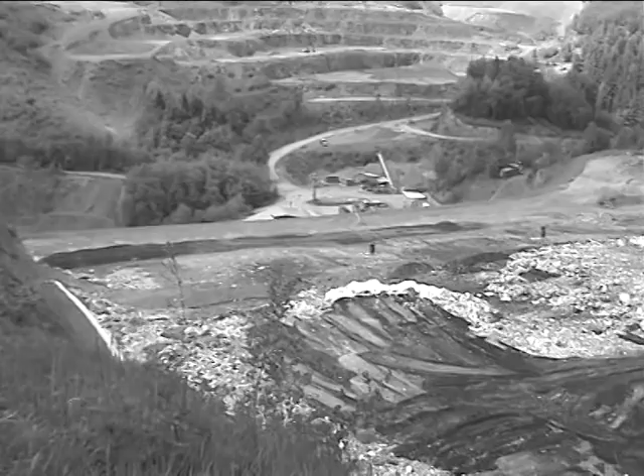Every day we produce tons of waste. Unfortunately, the vast majority of what we throw away ends up in landfill sites. In the Czech Republic, there are around 400 landfill sites in operation, and still more have been sealed up. We have buried a huge amount of problematic and dangerous materials underground. This inheritance for future generations has rightly been called an ecological time bomb.

Among the municipal solid waste stored in landfills, a variety of rotting and fermenting processes are also taking place. Viruses, bacteria and other pollutants are multiplying. In order to keep these hazardous substances from getting into the soil and thereby threatening the ecosystem, landfills are lined with impervious films. However, in time these crack and harmful substances leak out into the soil. It is also very difficult to find space for landfills, the establishment of which devalues agricultural land. If we continue down this path, then within a few years we could literally be wading in rubbish.

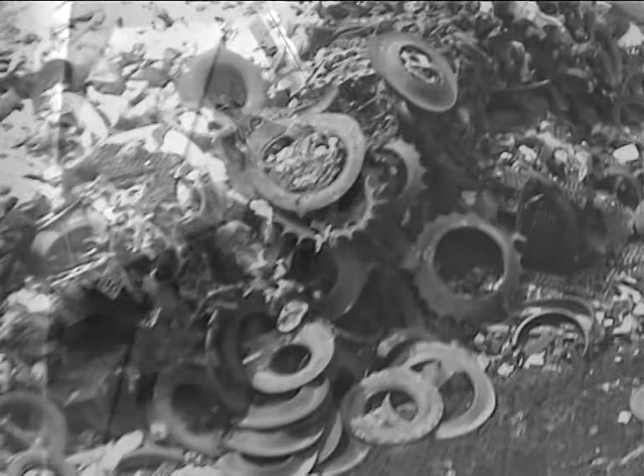The trend in the European Union is to limit landfills and instead incinerate waste for its own benefit. In the EU, individual states resolve environmental issues together, as this field does not respect political borders. Obviously, incineration does not preclude recycling, because even after sorting recyclable materials, a large quantity of combustible waste remains. A modern incinerator gets rid of waste on the one hand and uses its energetic potential for producing heat and electricity on the other. How does it do this?

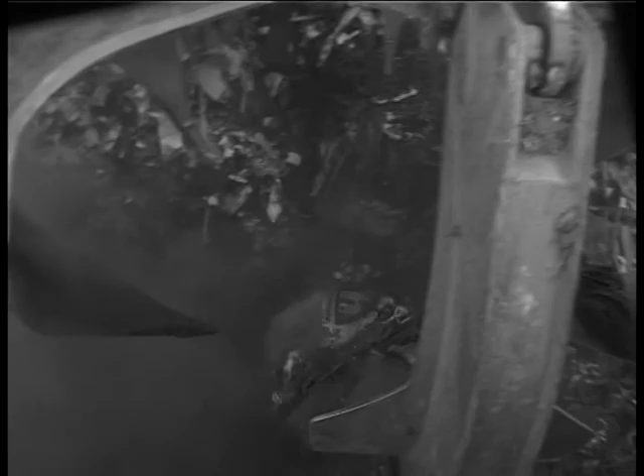You will find out in the next few minutes as we introduce the operation of the Liberec municipal waste incinerator of the Termizo stock company.

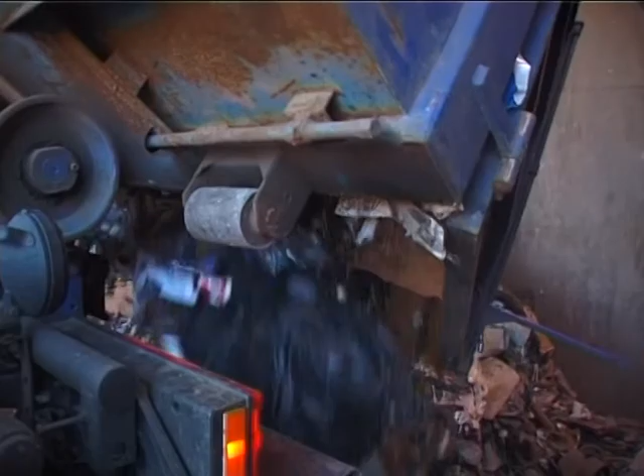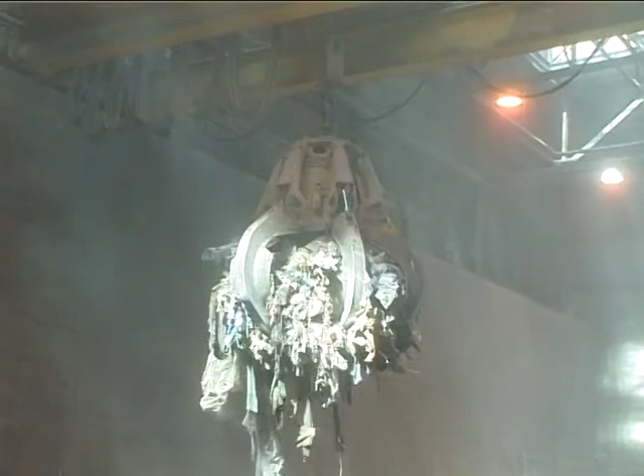The incinerator is a facility for energy recovery. More specifically, it uses solid municipal waste that would otherwise end up in landfills for heat production. The Termizo facility has an annual capacity of 117,000 tons, which is half of the waste produced in the Liberec region. This capacity is filled without a problem. The annual supply of heat to the central distribution network is 600,000 gigajoules, and the facility also supplies 13,000 megawatt hours of electrical energy to the electricity grid per year.

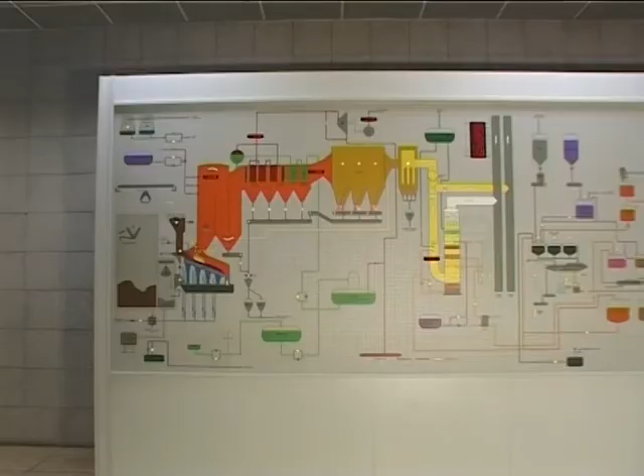The Termizo Liberec incinerator was put into operation in 1999 and since then has worked without problem. Four highly qualified workers take care of the running of the facility in continuous shifts. Operation of most technological units is fully automated. The staff carry out surveillance and control of individual parts of the equipment of the incinerator.

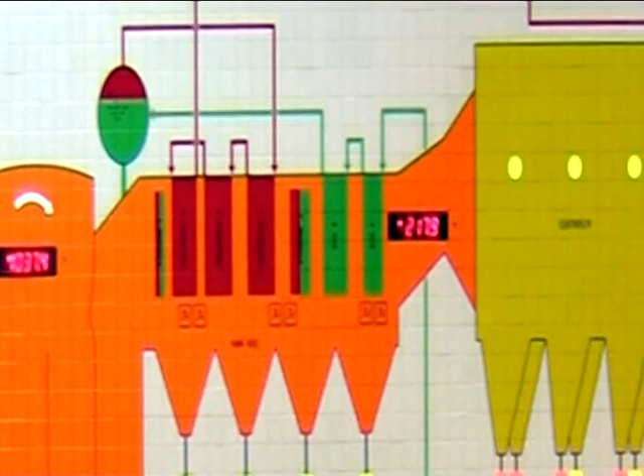The system by which the incinerator literally converts waste into electricity and heat can be seen in this diagram. The waste is first stored in the bunker, from where it goes to the furnace, where controlled incineration takes place. The steam generated is piped to the heating plant, and then through the centralized heat supply to individual users in Liberec. In the meantime, the steam is used for the turbine that powers the generator where electricity is produced. This is used for the facility's own needs and further to the energy distribution network. That is how the Termizo incinerator in Liberec works.

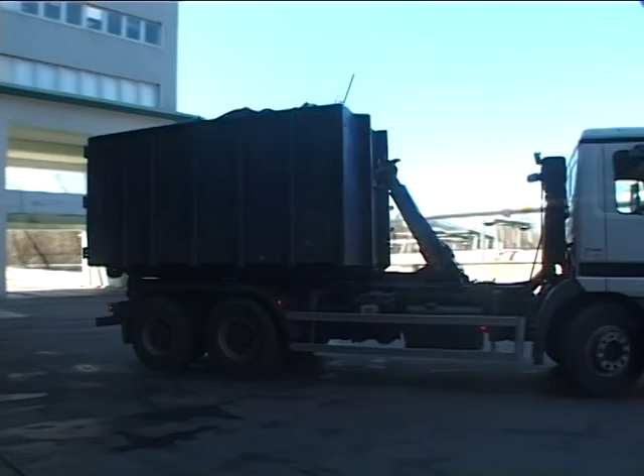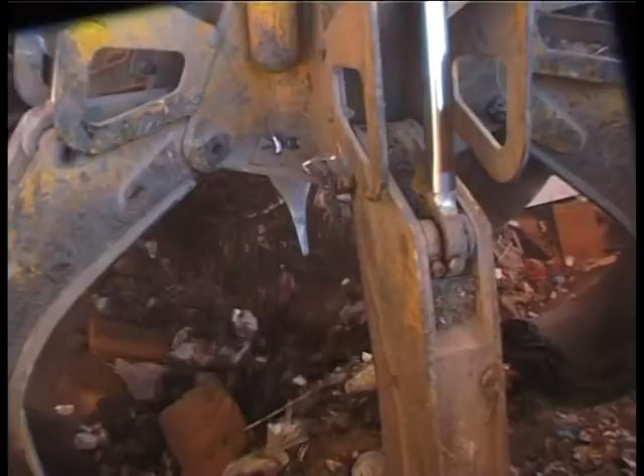Let us have a closer look at its technology. Solid municipal waste is taken to the bunker. This is accessed by 5 hydraulically controlled gates. In the bunker, the waste is mixed with the aid of a crane, thereby constantly preparing it for complete combustion. If necessary, large waste is crushed by hydraulic shears.

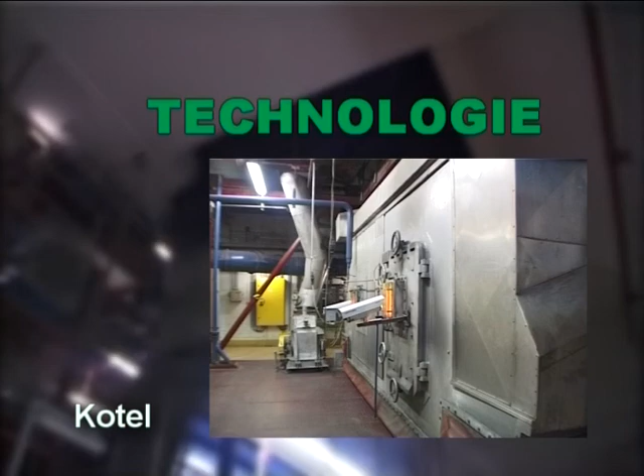Following the preparation, the crane operator loads the waste into the furnace funnel. The facility can process 117,000 tons of waste per year, meaning that an average of 15 tons per hour go through the funnel. From the funnel, the waste proceeds to the hydraulic feeder, which passes it on to the grid.

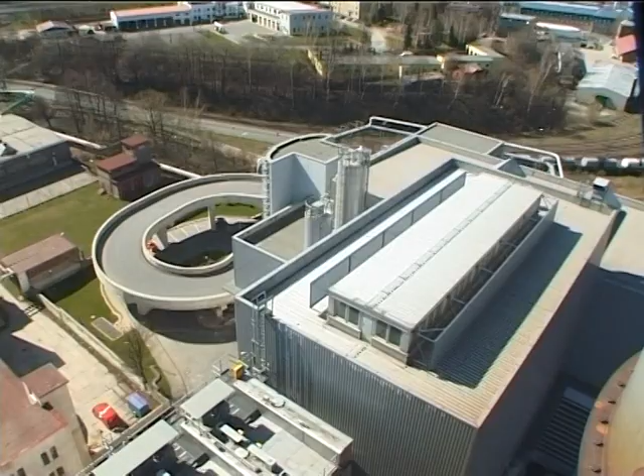The waste is burnt on this moving grid. Combustion air is brought to combustion and blown under the grid from the waste bunker by a ventilator and heated with a steam heater. This causes a slight negative pressure in the bunker, reducing odour and dust emissions to the immediate surroundings.

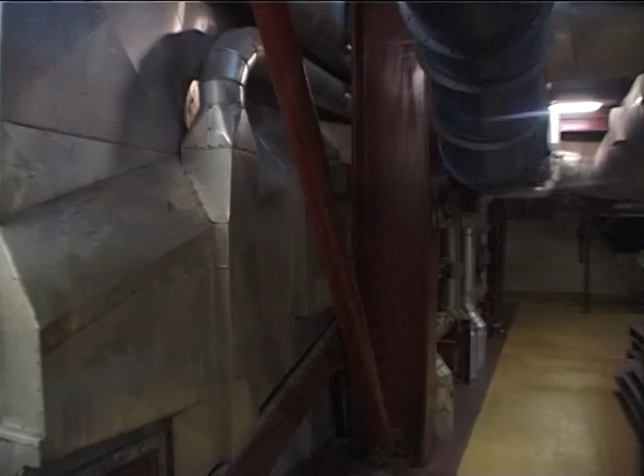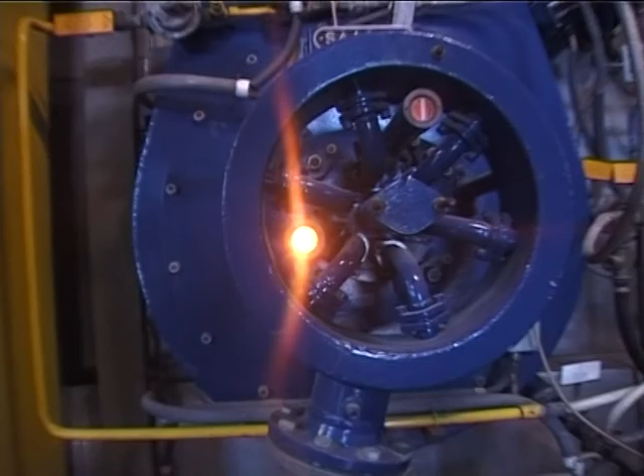Secondary air and recirculated combustion products are brought from combustion to the boiler and blown into the combustion chamber by ventilator. This reduces the amount of combustion products discharged to the atmosphere through the chimney and completes the management of the combustion process. Natural gas is used for waste combustion, and the combustion process is fully automated.

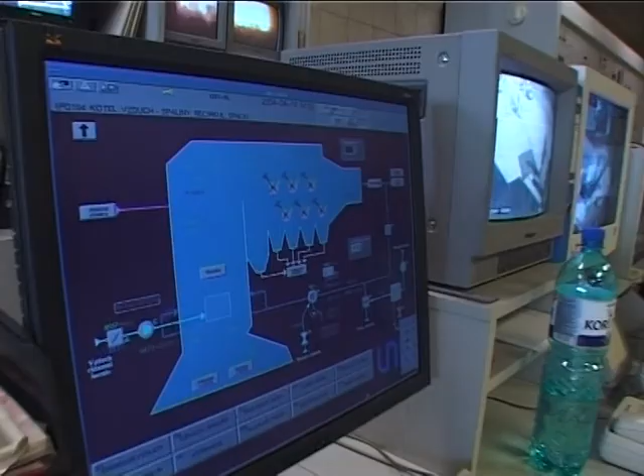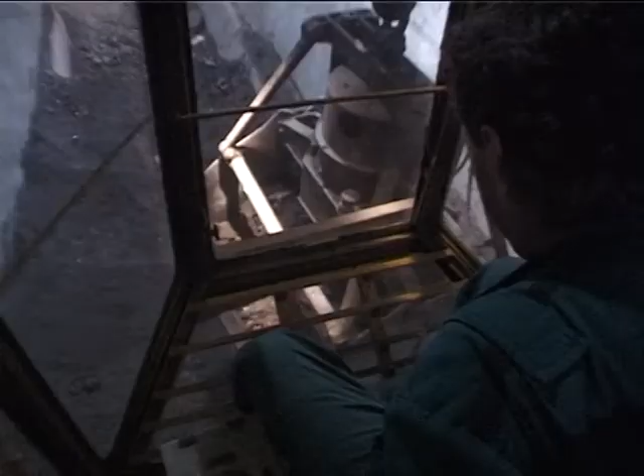The control system monitors individual combustion parameters and continually evaluates any deviations from the required state. This ensures complete combustion and the high quality of non-combustible cinder and fly ash residues. Burnt cinders contain a maximum of 1.5% carbon, which is proof of very good combustion.

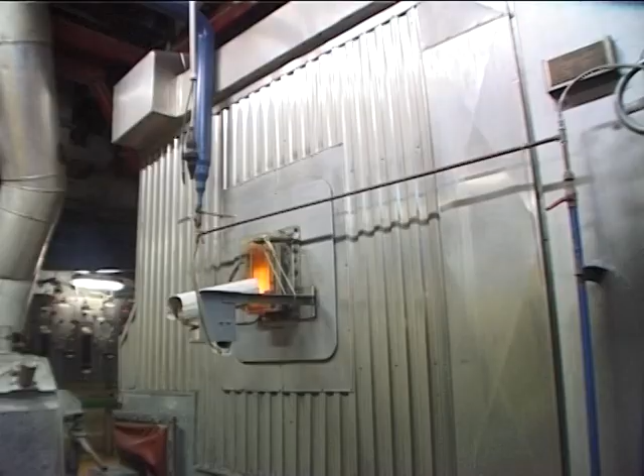The combustion temperature on the grate varies according to performance from 900 to 1100 degrees C. In the burning out zone beyond the combustion chamber, where combustion products remain for 2 seconds, the temperature is between 850 and 1100 degrees C.

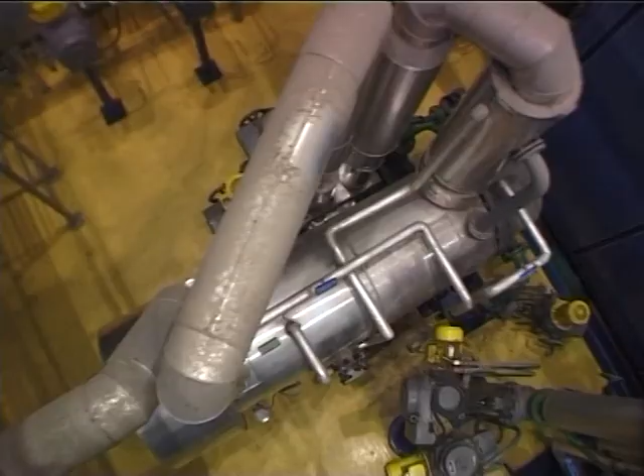Energy released during waste combustion is collected in the form of heat and transmitted to the production of steam. The rated performance of steam in the furnace is 43 tons per hour. The steam has a temperature of 400 degrees C and a pressure of 40 bar.

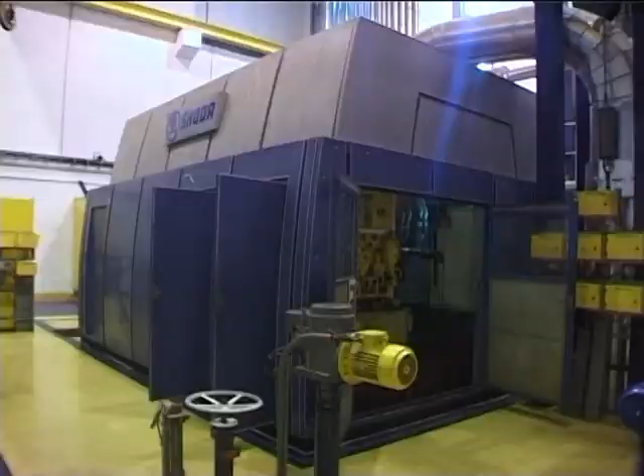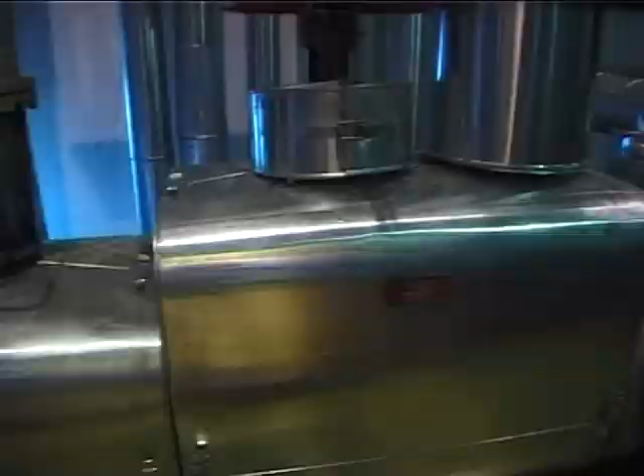This steam is first piped to the back pressure turbine, which has a rated performance of 3.05 megawatts. Thanks to reduction in the turbine, the parameters are reduced to 230 degrees C and 8 bar. Up to 6,000 megawatt hours of electrical energy enters the electricity grid in this way per year.

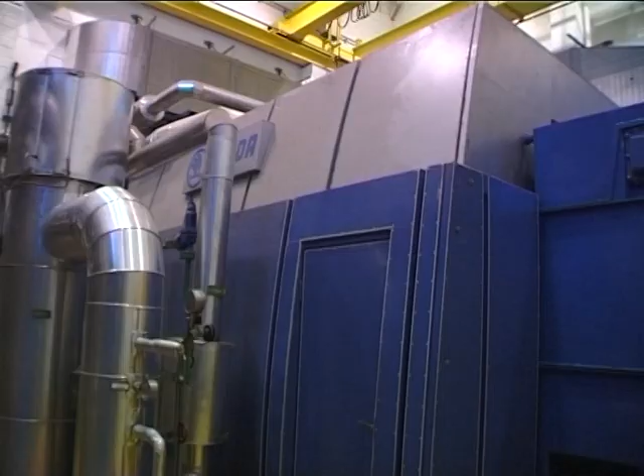Steam from the turbines is piped to the district heating system in Liberec. The effective heat supply is approximately 600,000 gigajoules per year. The described process combining the production of thermal and electrical energy is called cogeneration.

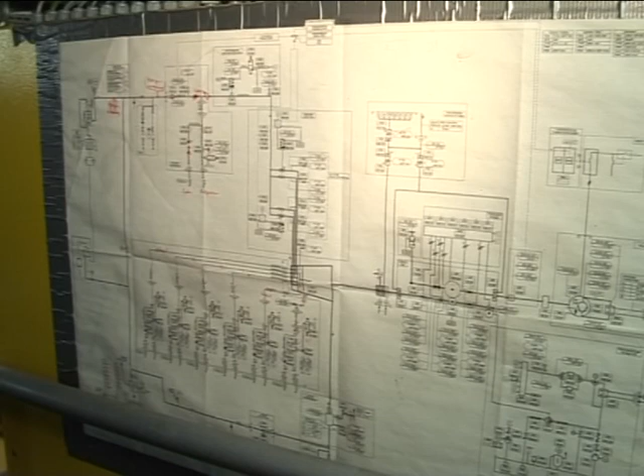The efficiency of use of the steam produced is around 80%, which shows the high level of efficiency of the process. If the customer does not use up all the heat produced, the heat is subsequently used in the condensing turbine with a rated performance of 1 megawatt.

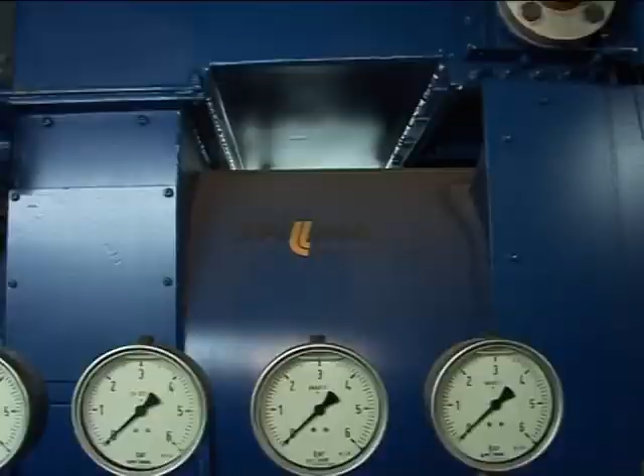Part of this electrical energy is used for our own needs, that is, for the running of the facility. The rest is supplied to the energy grid.

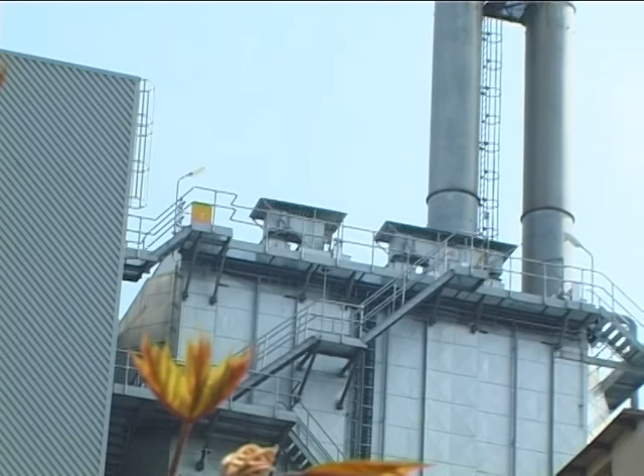As well as high energy efficiency, a strong emphasis is placed on ecology in the Liberec incinerator. Resulting combustion products are cleaned, as is the water used, and fly ash with cinders. For these reasons, electricity produced in incinerators is generally among the cleanest forms of energy.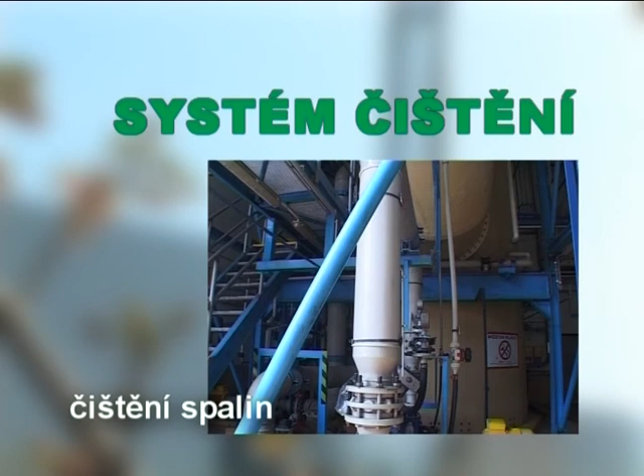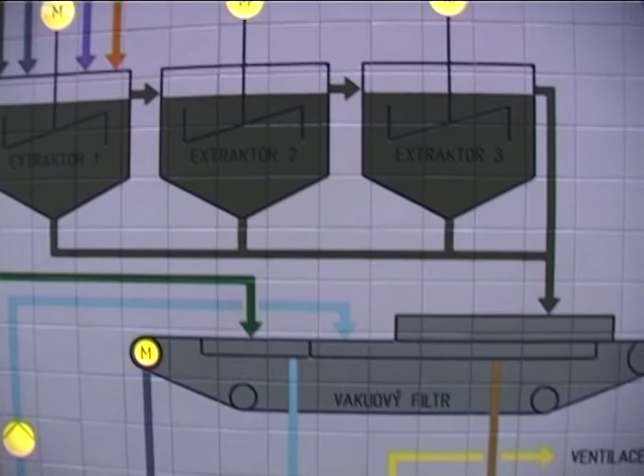First, we will acquaint you with the process of flue gas cleaning. There are very strict emission limits on combustion waste. In order to achieve these limits, 4 degrees of flue gas cleaning have been installed in the incinerator. These are the reduction of nitrogen oxide, fly ash capture, the capture of dioxins, and wet flue gas cleaning.

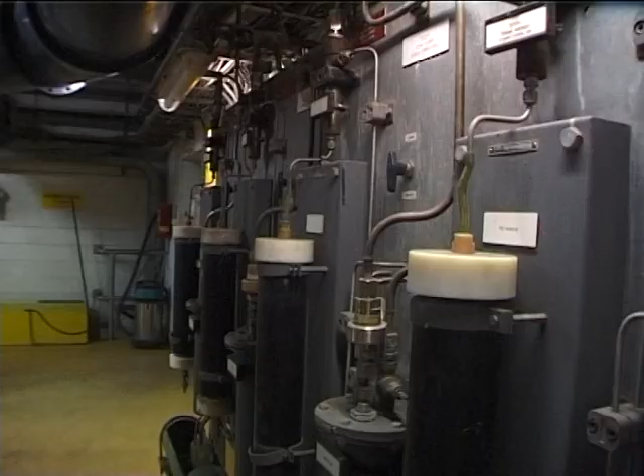Nitrogen oxide reduction in the incinerator takes place directly in the combustion chamber, which is administered with a 25% ammonia water solution. Subsequently, the so-called selective, non-catalytic reduction of nitrogen oxides is carried out.

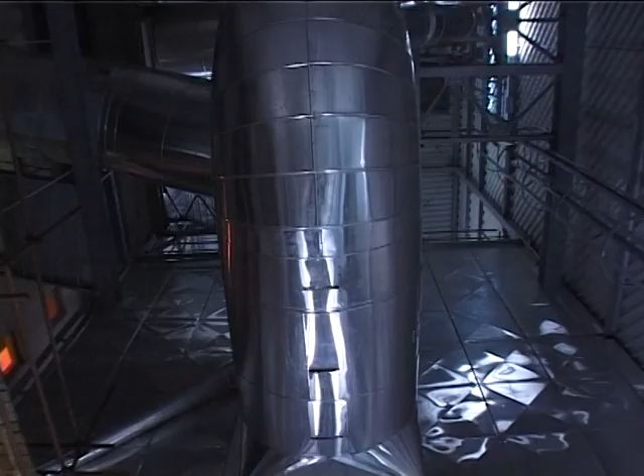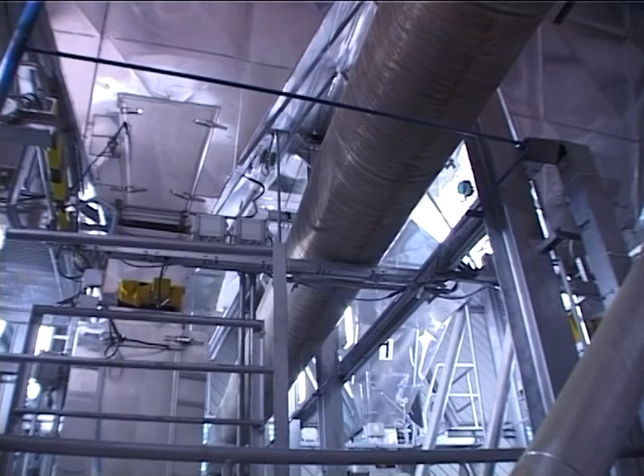Dioxins are disposed of with a special filter. On this dioxin filter, they are split into elemental components with the aid of catalytic oxidization, that is water, carbon dioxide and hydrogen chloride. Oxidation takes place in a layer of woven filter with a filter area of 1,800 square meters.

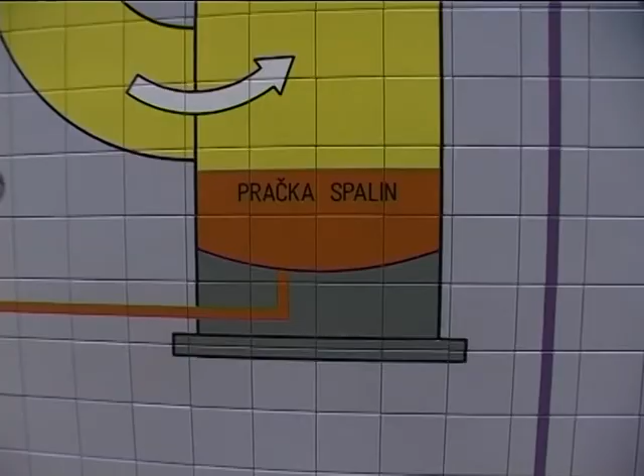The remaining gas oxides are cleaned from the incinerator by the so-called wet process. For this, the flue gas washer is used, which has 3 stages.

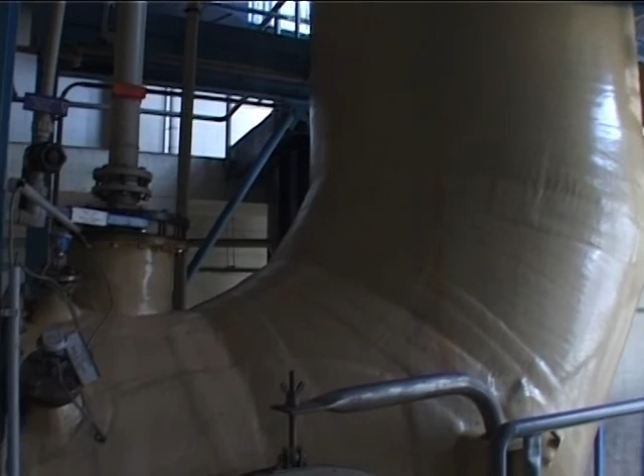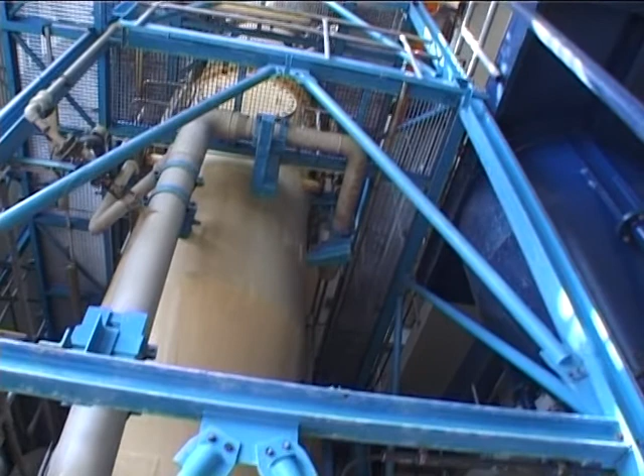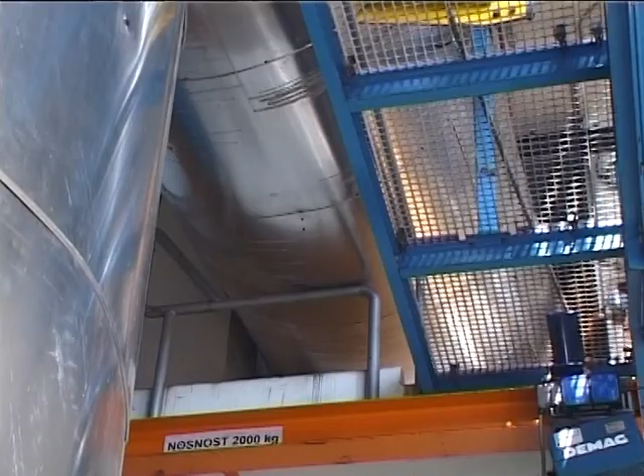In the second stage of flue gas washing, the absorption of sulfur dioxide and sulfur trioxide takes place. The flue gases are brought into contact with softened water, into which caustic soda is administered by regulation. The flue gases rise from the bottom to the top, thereby filling up the washer against the current of technical water.

This leads to a change of substances, and the sulfuric oxides removed from the combustion products have a pH of 6 in the technical water.

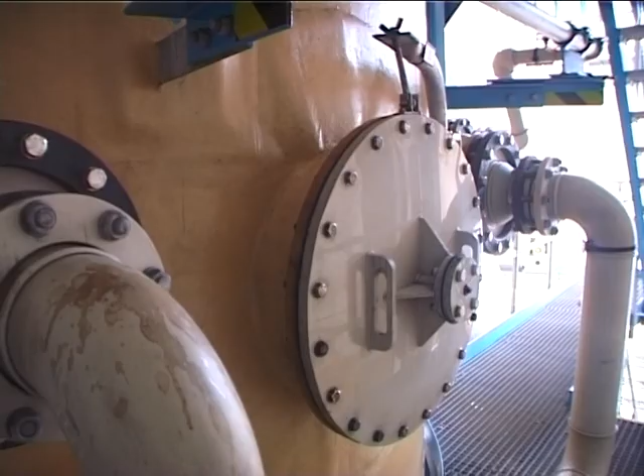The third stage of flue gas washing is the ring jet. This removes dust and aerosols, that is, the smallest particles. Following the third stage of wet cleaning, the flue gases pass into the chimney. Their temperature upon exiting the washer is approximately 65 degrees C.

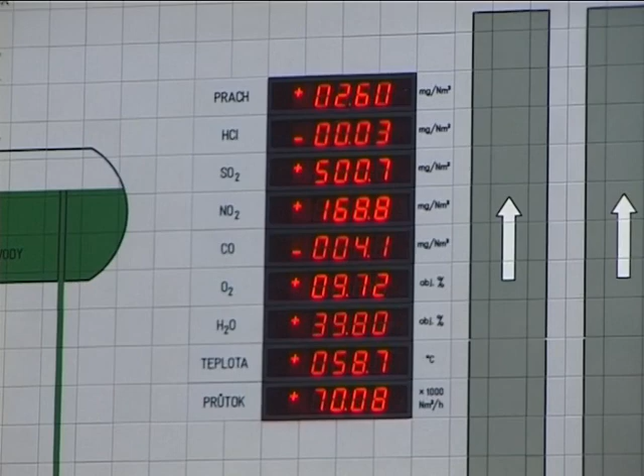The cleaned flue gases are released through the operational chimney into the atmosphere. At the very end of the chimney, the gases are continuously measured.

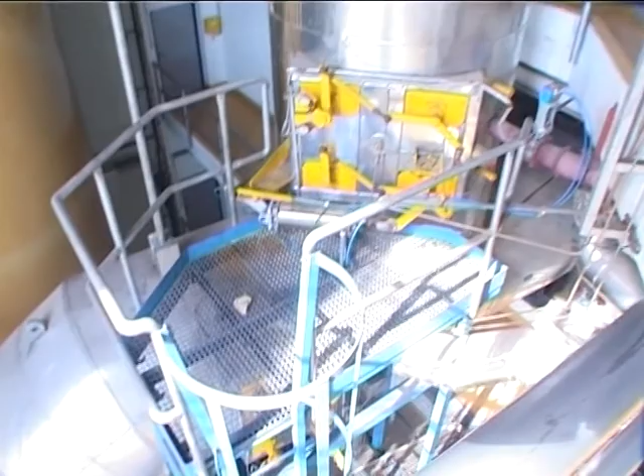Upon failure of the washer or during a power cut, the flue gases are automatically transferred to the so-called emergency chimney, which is normally closed by automatically controlled flaps. At the same time, the incineration process is stopped, and for as long as is necessary, only flue gases from the burning out waste in the incineration chamber are released. That is how flue gases are released safely into the atmosphere during exceptional circumstances.

Besides flue gas, waste incineration also produces cinders and slag. To stop raw cinders exhibiting their hazardous qualities, soluble salts and extractable heavy metals are removed from them. This is done with the aid of acidic water, which comes from the flue gas washer, more specifically from the first stage, that is the quench.

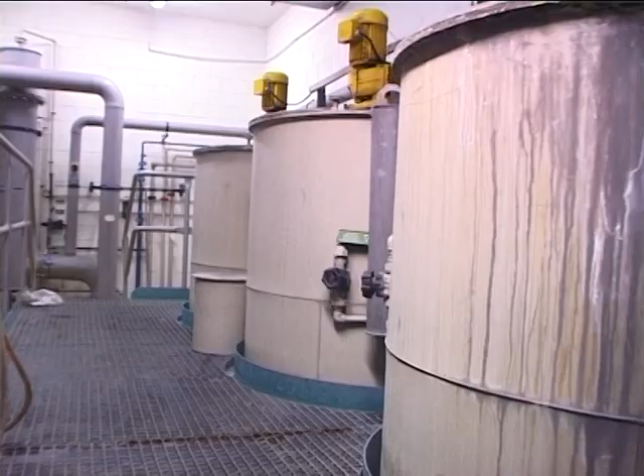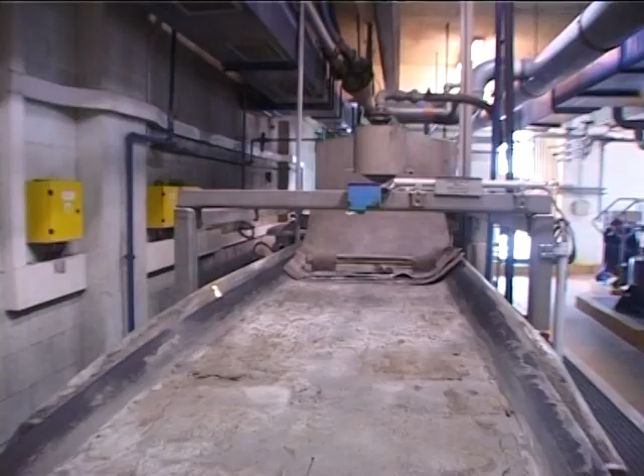Cinders stored in the silo after their removal from the flue gas are administered to a trio of extraction tanks. Here they are infused in water with pH 3.5 and a temperature of 65 degrees centigrade. Next, they are brought for dehydrating on a vacuum filter belt.

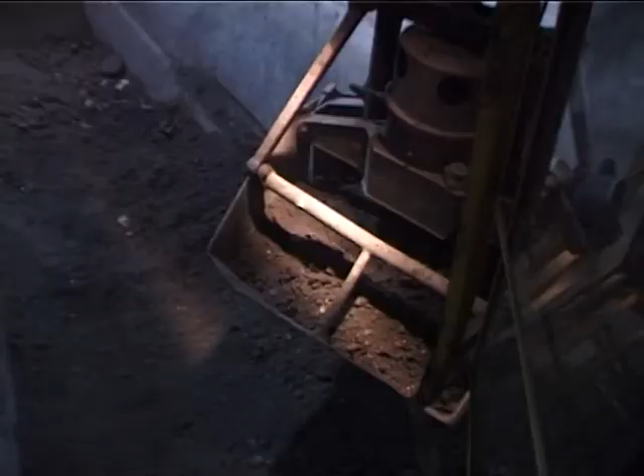Cinders washed in this way are taken to the slag bunker, where they are mixed with slag. This does not exhibit dangerous characteristics. The resulting material is used in construction, e.g. for landscape cultivation. The qualities of this product are guaranteed by production in accordance with quality certificates.

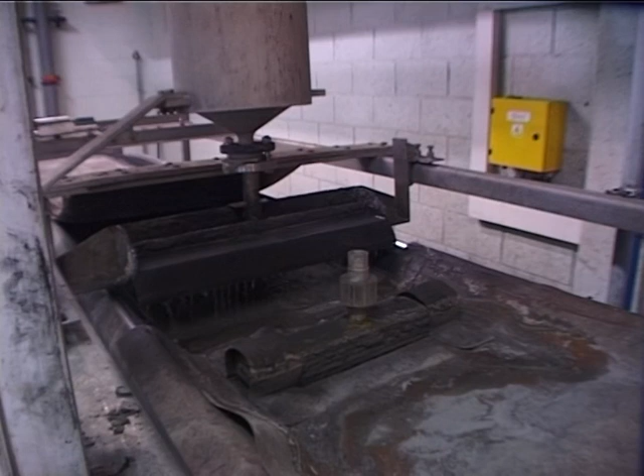To be truly environmentally friendly, we still have to clean the water used in the wet cleaning of the flue gases in the washer and in washing cinders. This acidic water flows into the treatment plant, which consists of 3 tanks. Lime milk, hydrochloric acid and other chemicals are gradually added to the water.

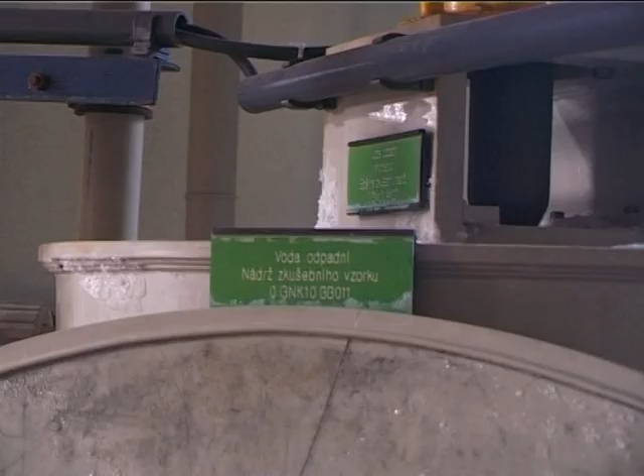At pH 9.5, heavy metals are excluded and settle into a fine slurry of flakes. This slurry settles in the sedimentation tank, from where now clear water flows to the final control point. This is the last stop before it enters the sewage system.

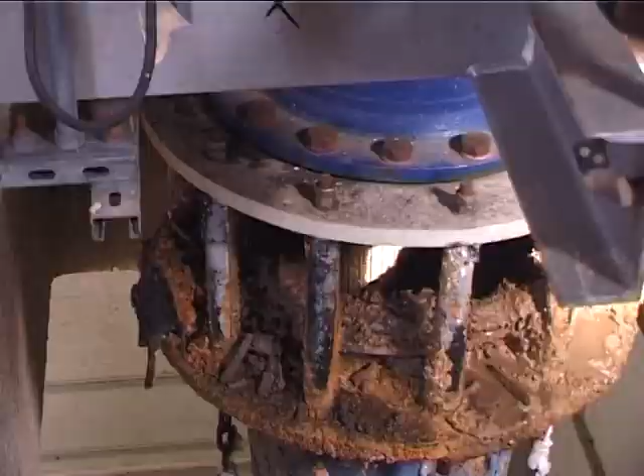The slurry is washed and dehydrated in a candle filter until it turns to solid waste, so-called filter cake. This is collected in special containers and taken for solidification, after which it is stored at a landfill for hazardous waste.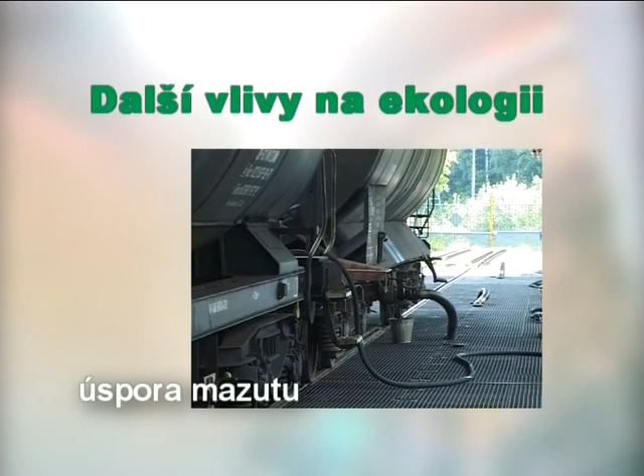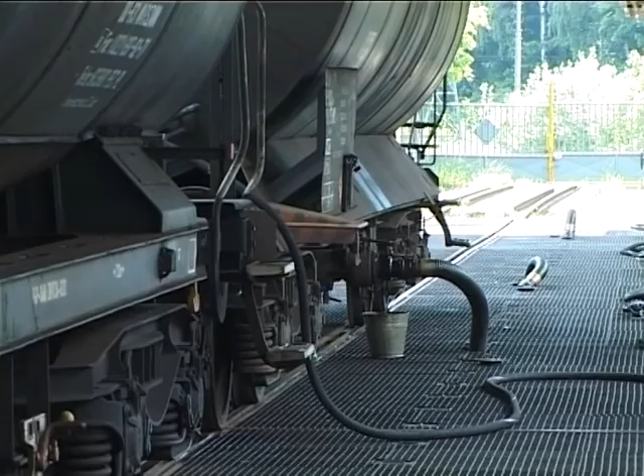Another environmental benefit is the fact that the energetic use of waste saves primary resources. Heat production in the incinerator limits production using other energy resources, and in the case of Liberec, this means savings of 17,000 to 20,000 tons of heavy fuel oil every year. This is not only beneficial for the environment, but for inhabitants as well.

The operation of Liberec incinerator is complicated, and we hope that we have managed to explain the system as clearly as possible. We do not destroy the environment in which we live. Let us strive to use apparently useless waste for our benefit. Our children will surely appreciate it in the future.